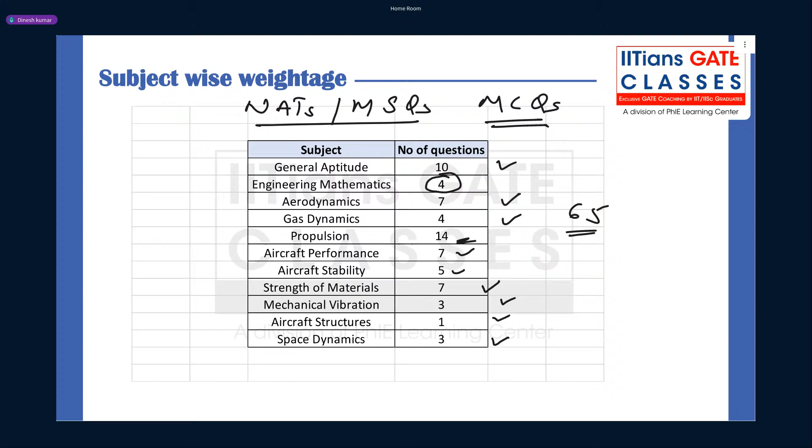In terms of question types, there were more NATs and MSQs, and less MCQs. So the advantage is there will be less negative marking for those who attempted a high number of questions. The NATs were straightforward, most of them easy to solve, so those who solved NATs with accuracy will get very good marks in this paper.

So that is about subject weightage. So guys, any concern or any doubt? I think whatever I am discussing, is it clear?

Now for paper analysis, since it's an easy paper, the advantage is all of you are very happy, and you guys should be happy after this paper.

And most of you could attempt a good number of questions. Okay. And again, now accuracy will matter most. What are the disadvantages of this paper? We discussed internally 1 week before itself. The gate scores are usually low in this paper against obtained marks. So you may get very good marks, like 57 marks or 55 marks. So with these 55 marks, this time your gate score may be 600 to 650. In earlier papers with 55 marks, in a 2023 kind of paper, your gate score is always greater than 700, or 700 to 750. So clear.

So your marks this time may be more, but your gate score may not be that high as in previous tough papers. Okay. Now, what are the good marks to get a very good rank? 55 plus marks with a good attempt and good accuracy is good to get a good 2 digit rank, under 100 kind of rank. And if you want to get a single digit rank, then your attempt should have been around 60 plus minus, with an accuracy of around 80%. Those who attempt around 60 plus minus, their attempted marks will be around 90, and with 80% accuracy they will be getting around 75 marks.

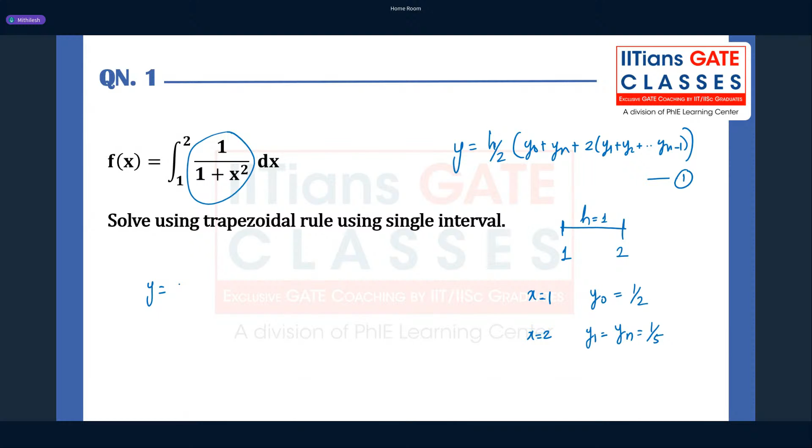And yn will be 1 upon 1 plus 2 square, which is 1 upon 5. So the value of y1 or yn will be 1 upon 5. So using this equation number 1, we can find it. Y is equal to 1 by 2 because h is 1. Y naught is 1 by 2, and yn is 1 upon 5. We don't have any other terms, so you can ignore it, since we are dealing with only one single interval.

So if you further solve it, it will become 7 by 10 into 1 by 2, which is equal to 7 by 20. And if you solve it, it is 0.35. Okay, so it's quite easy. Do you have any question in this? Do you have any doubt?

Okay. Then let me proceed towards the next question. Okay, this question is there. If P plus Q is proportional to P minus Q, then the value of P by Q is, and they have given the options: depending on P and Q, constant, depending on P, or not known. So let's try to solve it.

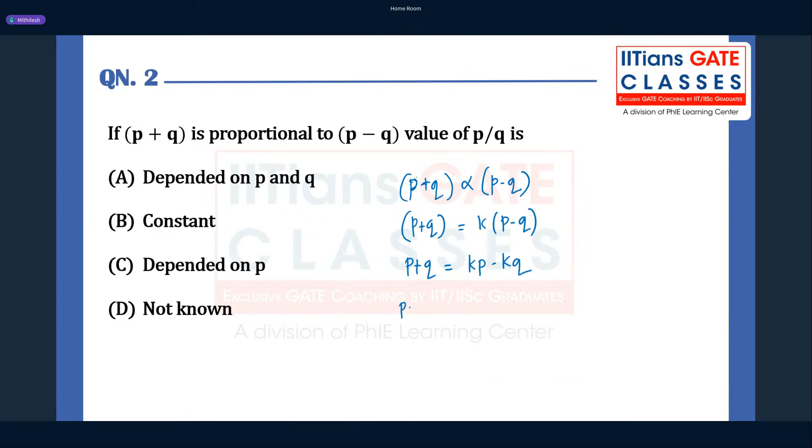Starting with the given data, P plus Q is given as proportional to P minus Q. So we can say that P plus Q is equal to K times P minus Q. And if you simplify it further, P plus Q will be equal to Kp minus Kq. Let's take the P and Q on either side. So it will be P minus Kp is equal to minus Kq minus Q.

So further, if you take P common, it will become 1 minus K. And here, if you take minus Q common, it will become 1 plus K. And now P by Q can be written as minus of 1 plus K divided by 1 minus K. So we can clearly see K is the proportionality constant. And if we add or subtract 1 and then make its division, it will end up with again a constant number. So we can say it is a constant. So option B is correct in this case.

We got one question here from Rohit about the previous question. That is, can we have 0.39 as an acceptable answer? So I'm not completely sure, Rohit, what is the range they have given you within the question, whether it's up to 2 decimal places or 1 decimal place. So depending on it, it will vary.

And yeah, if they give a range like 0.3 to 0.4, maybe in that case, your answer is also acceptable. And if they give a very precise range, 0.34 to 0.36, then in that case, they may ignore it. So yeah, it's depending on what range they have decided and how many decimal places they are mentioning in the question.

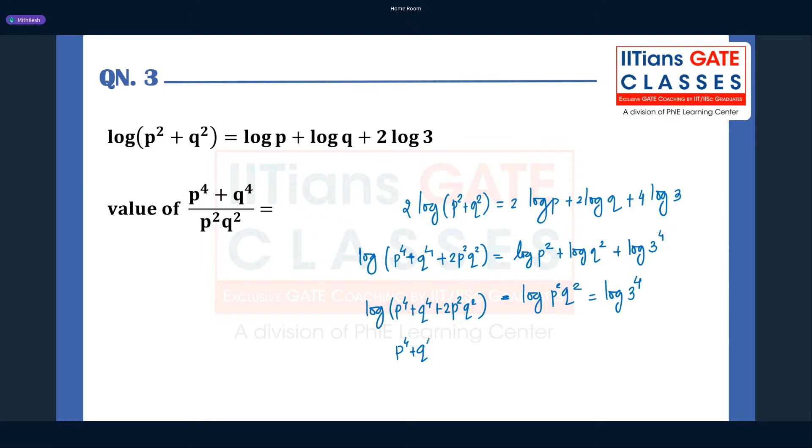Log of p raised to the power 4 plus q raised to the power 4 plus 2p square q square. So log a minus log b is equal to log of a by b. So p raised to the power 4 plus q raised to the power 4 plus 2p square q square divided by p square q square is equal to log of 3 raised to the power 4. Here also log, so we can cancel the log on both the sides. So this will become

p raised to the power 4 plus q raised to the power 4 divided by p square q square, if you break it at this point, and then one more term here you'll have, 2p square q square divided by p square q square. And that is equal to 3 raised to the power 4. So you can cancel out these two terms, you will end up with a 2. This is the required term.

So p raised to the power 4 plus q raised to the power 4 divided by p square q square plus 2 is equal to 81. So the answer is 81 minus 2. And yeah, 79 is the correct answer in this case. Okay. Yeah, most of you have answered it correctly.

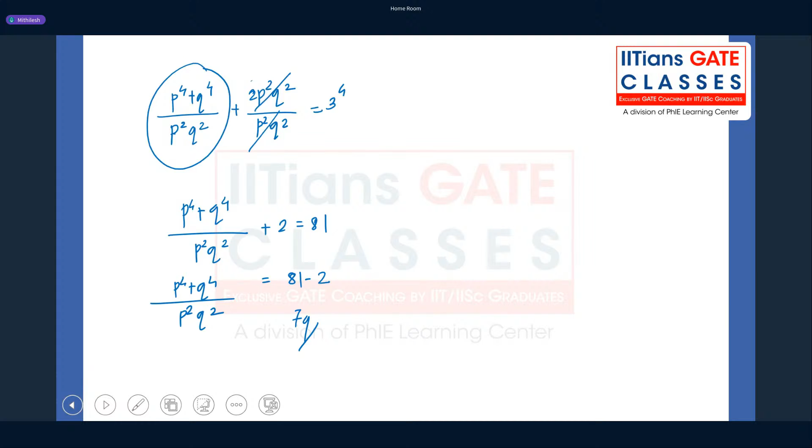Let me go to the next slide. We have this question from differential equations. Let's see what it says. They have given us the value of y, and they are asking us to solve a differential equation d2y by dx square minus 2p dy by dx plus p square plus q square into y is equal to. Let's solve it.

So the value of y is given. From this value of y, we can calculate dy by dx. I'll directly write the dy by dx term here. It is e to the power px into bracket p sine of qx plus q cos of qx. And if you simplify it inside, it will become p e to the power px sine of qx, second term, q e to the power px cos of qx. So this is how the dy by dx term looks like.

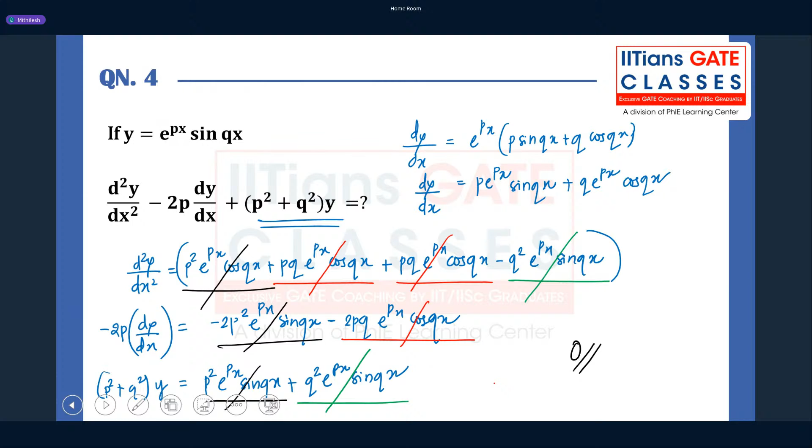And then we have p square e to the power px sine of qx, one more p square e to the power px sine of qx, and this negative term, and these cancel out with each other, hence the answer is 0. All the terms are getting cancelled, so you'll end up with 0 as the answer. I hope it is clear. Yes, most of you answered it correctly. Good. Let me go to the next slide.

Yeah, this one is from linear algebra. They are asking us to find the ratio of the largest eigenvalue to k. So the largest eigenvalue is maybe lambda max, divided by k. So in this case, first of all, we have to calculate k, find out the eigenvalues, decide the maximum or largest eigenvalue, and take the ratio with k. In this case, they have given us that the determinant of the given matrix is 3. So let's first use that data.

Determinant of the given matrix is 5, k, 4, minus 1, determinant equal to 3. So 5 into minus 1 is minus 5, plus 4k is equal to 3. So 4k is equal to, this minus 5 goes on the right hand side, it becomes 8, right? And this implies k will be equal to 8 by 4, so it will be 2. So the value of k, first of all, in this case is 2. Now we'll make use of this k and put it into this equation and get the value.

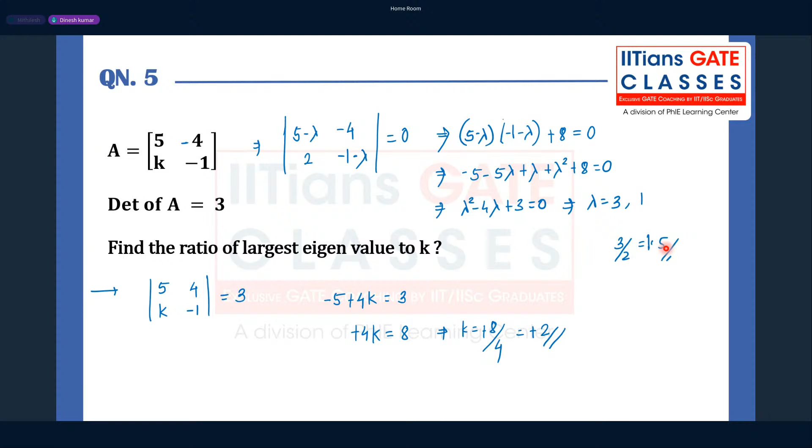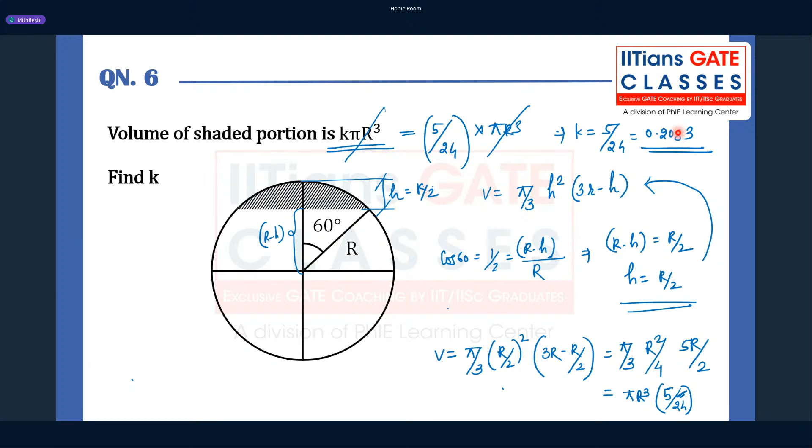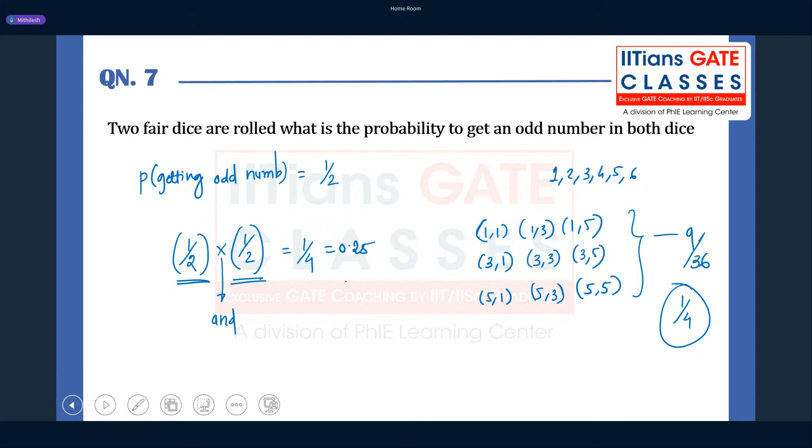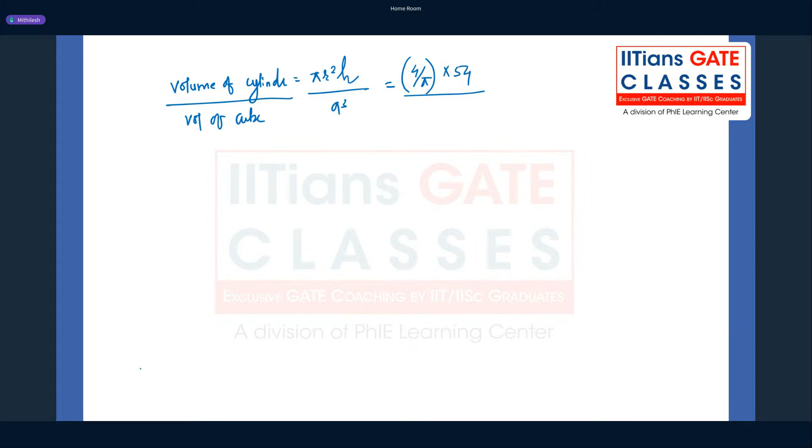Height is 54, so we have 4 by pi times height 54, divided by volume of the cube, which is 36 into 6, or 6 cube. Calculating through: 6 ones are 6, 9 ones are 9, 4 ones are 4 — the answer comes out to 1 by pi. So option A is correct.

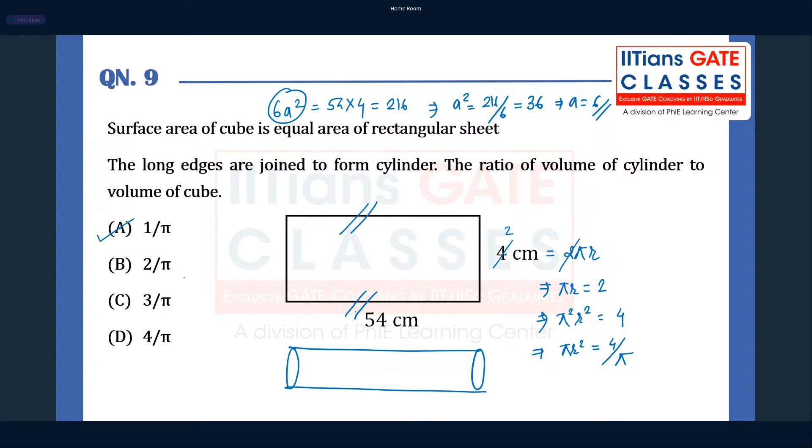Most of you answered it correctly; 1 by pi is the correct answer. Let me go to the next slide. Is this clear to all of you? Any doubt in this question? Okay, I'll proceed to the next question.

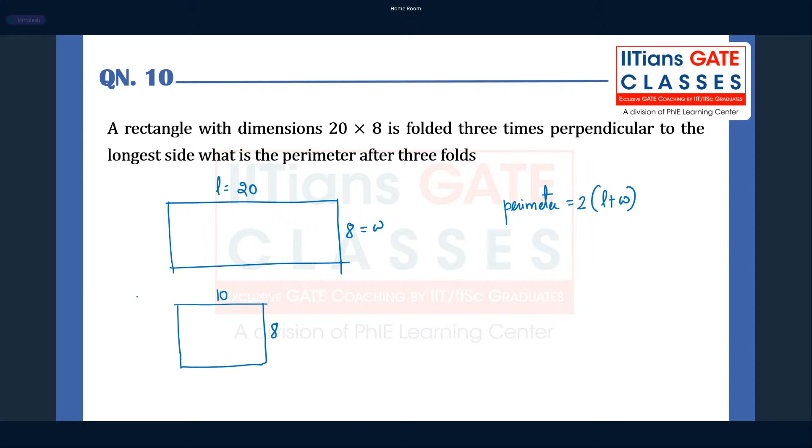If I fold it once, it becomes 10 by 8 — that's the first folding. For the second folding, it becomes 5 by 8. Folding a third time, it becomes 2.5 by 8. Calculating 2 into (2.5 plus 8), that's 10.5 multiplied by 2, giving 21 as the answer.

Any doubts in this case? Okay, we have some comments here — some students got 18.

Okay. Okay, so here.

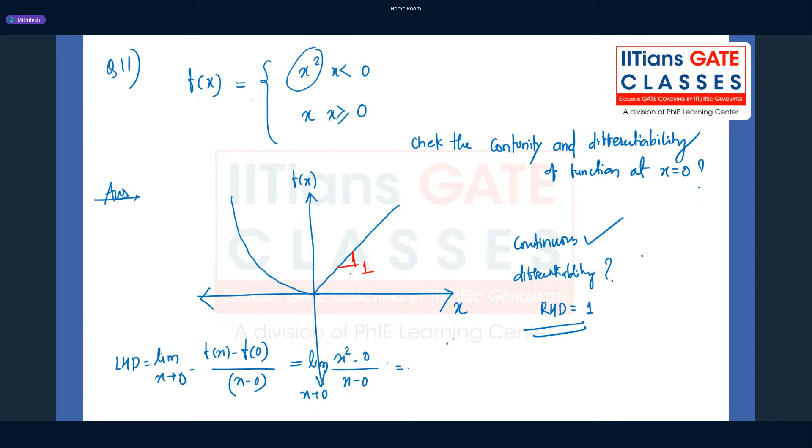Basically, limit x tends to 0 from the negative side, and you can clearly say x square by x is x. If you put the value of x, you'll end up with 0. Because you can clearly see the curve is becoming a little bit horizontal here - if you approach very close to 0, the curve becomes horizontal, meaning its slope is 0, and that is what we are getting.

So it's correct: the left hand derivative is not equal to the right hand derivative. Hence, this is not a differentiable function. So continuous, yes, but not differentiable. The correct answer is that it is continuous but not differentiable.

Okay, we have some questions about the previous question, I'll come back to that. Some of you got 18, some of you got 21, because we clearly don't know how the wording of the question is at this point. So whatever you told us, we made these questions and explained them to you. Is there any doubt on this particular question?

Is it clear, this differentiability and continuity? Most of you got it correct, that it is continuous and not differentiable. I'll go back to the previous slide. Yes, so as I said previously, I calculated that.

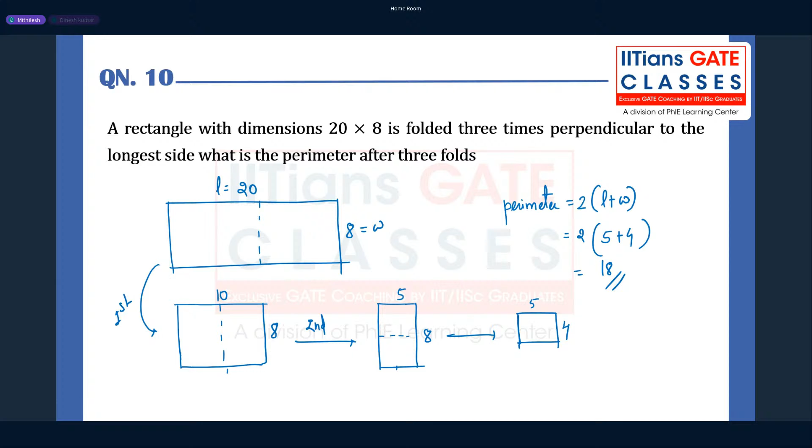Just one comment I'll add is it completely depends on the wording here. If they say about the length, in this case the answer is 21, and if they say about whichever is the longest side, then 18 is the correct answer.

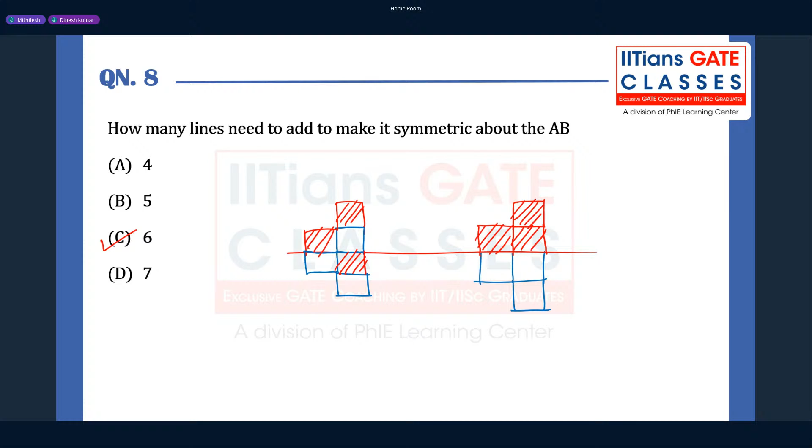Any doubt? This figure is a little unclear, but looking into the options, 6 is what we feel is the correct answer to make it symmetric. Most of you have gotten 6, so I think it should be correct.

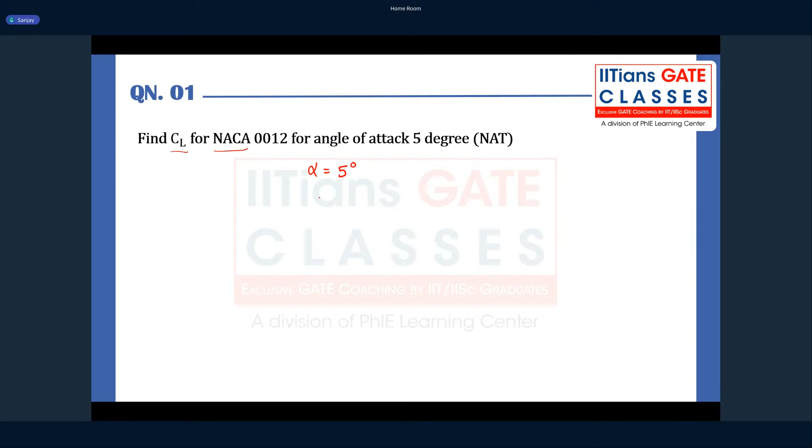Because without mentioning that statement, it is really not possible to proceed. So assuming that thin airfoil theory is applicable, we can use the results from thin airfoil theory that the lift curve slope, that is CL alpha, is equal to 2 pi. Okay, so the lift curve slope is 2 pi. So how can you find CL? CL is very straightforward. It is just 2 pi into alpha.

Okay, because it is a symmetric airfoil, right? NACA 0012 is a symmetric airfoil. You see the first two digits, it says that we do not have any camber, right? So it is a symmetric airfoil. We do not have a zero lift angle of attack. So CL would simply be equal to 2 pi alpha. Okay. So we just have to calculate this, right? So 2 into pi into alpha.

Now remember, guys, the alpha that you'll be substituting over here would be in radians, not in degrees, right? So you have to be careful about that. So 5 into pi by 180. Okay. So this is the angle in radians. Okay, just have to calculate this. Yeah, I think someone has already commented. The answer is 0.55. Yeah, I think that's what most of you have got.

Yeah, so it is 0.55, right? So CL is 0.55. So the lift coefficient is 0.55. Is this what you have got, everyone? All right. So I think this was a very straightforward question. Let's now move on to the next one. So if you guys have any doubts, any clarifications, please put them down in the comment box.

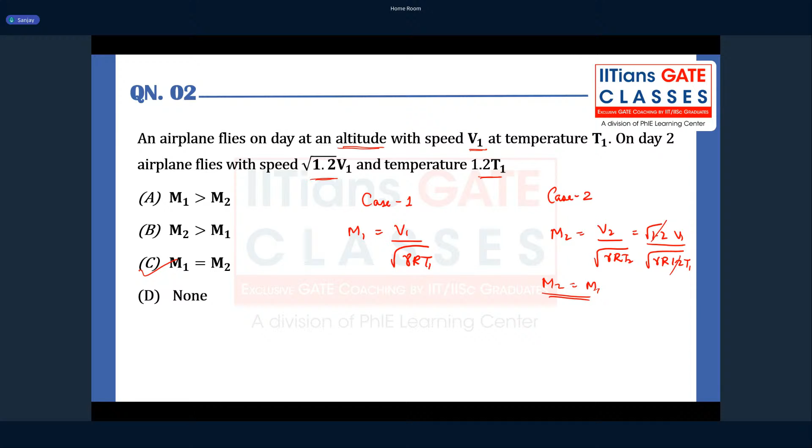Yeah, Rohit, you got some different answer. I think if these are the wordings in the question, then it should be m1 is equal to m2. Maybe you have made some mistake. So others also, have you got the same answer as C? All right. Okay. So that was very simple. Let's now move on.

So guys, from the potential flow theory, we have learned the elementary flows and superposition of elementary flows, right? So from potential flow theory, we know that when you superimpose a uniform flow with a source flow, what will you obtain, guys? Can you all say? If you superimpose a uniform flow with a source flow, what is the shape of the resultant potential flow that you obtain? It would be a Rankine half body, right? You will obtain a Rankine half body.

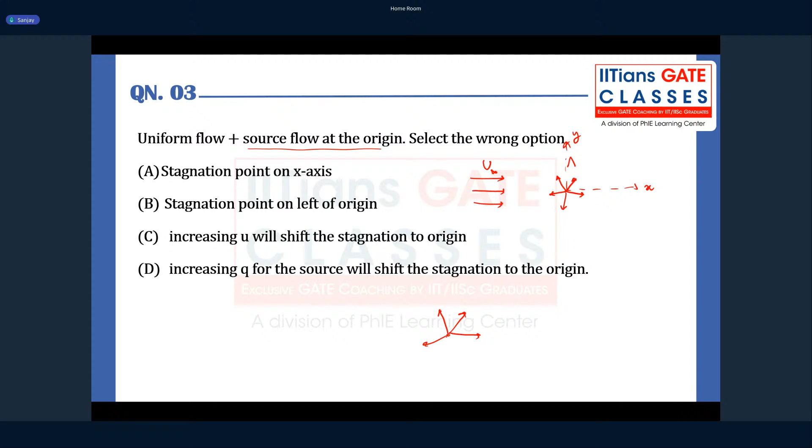So say here you have a source like this, and you add uniform flow, you will see that the streamlines would go just like this. So here it will go to infinity because all the flow towards the right is from the source, and all the flow towards the left is from the uniform flow, right? So what you obtain is a Rankine half body.

And guys, this is very well known from the potential flow theory calculations that the stagnation point for a Rankine half body is located at a distance of lambda by 2 pi v infinity, or u infinity, upstream of the source. Okay, it is upstream of the source.

Okay, so guys, this is very important: the stagnation point is located upstream of the source. So here in this case, if the source is located at the origin, the stagnation point will be on the negative x-axis. And what would be the distance of the stagnation point from the source? It is given by lambda by 2 pi V infinity.

Okay, so now let's look at the options. The first option says stagnation point on x-axis. That is correct, right? The uniform flow is aligned parallel to the source flow. There is no inclination to the uniform flow, so the stagnation point cannot lift off; it would be on the x-axis. So option A is correct, meaning it is a true statement. Option B says stagnation point on left of the origin, which is also correct. We just saw that the stagnation point will be on the left of the origin.

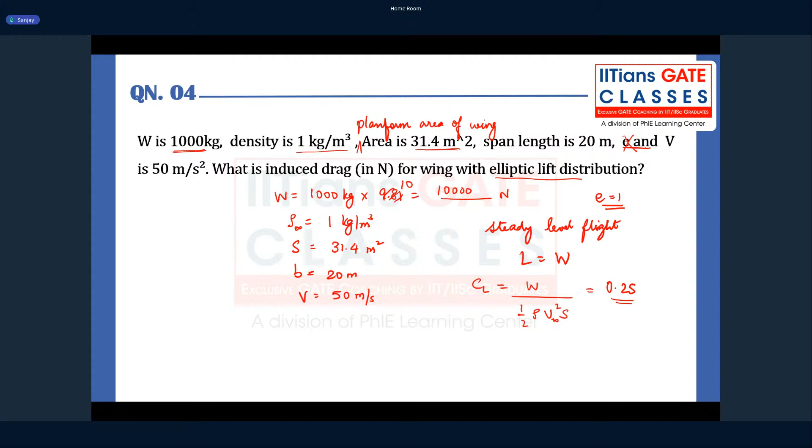So now once we have calculated CL, guys, we know the induced drag coefficient, that is CDI. Okay, Manjesh, you're getting 0.54. I do not know. If this is the data that is given in the question, then it would be 0.25. Anyway, we'll confirm all these answers once the official paper is out. So here just see the approach. We are not sure about the values, so that might change.

So CDI, the induced drag coefficient, is K CL square, right? It is directly proportional to the square of lift coefficient. So what is K here, guys? K is 1 by pi aspect ratio times E, into CL square. We know for elliptical, E is equal to 1, so this is not there. How will you calculate aspect ratio, guys? For a wing, aspect ratio is B square by S.

So just calculate. B square is 20 square, by 31.4. So what is the aspect ratio that you will get? 12.73. That is the aspect ratio that you get. So substitute all this in CDI and you obtain the value of CDI.

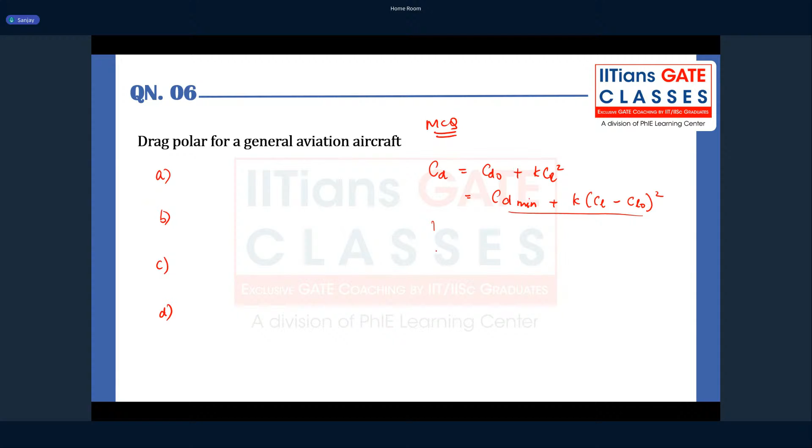So if you draw the drag polar curve now, this is CL, and this is CD. See, the drag polar could be drawn either way. You can have CD on the y-axis, CL on the x-axis, and vice versa. But let's take CL on the y-axis and CD on the x-axis, and then draw.

So you will see that it will be something like this. Here you will have the CD minimum. So the minimum CD is at CL is equal to 0. So this would be the drag polar curve. Did you guys find a similar curve in the options? Was it there? Can you confirm?

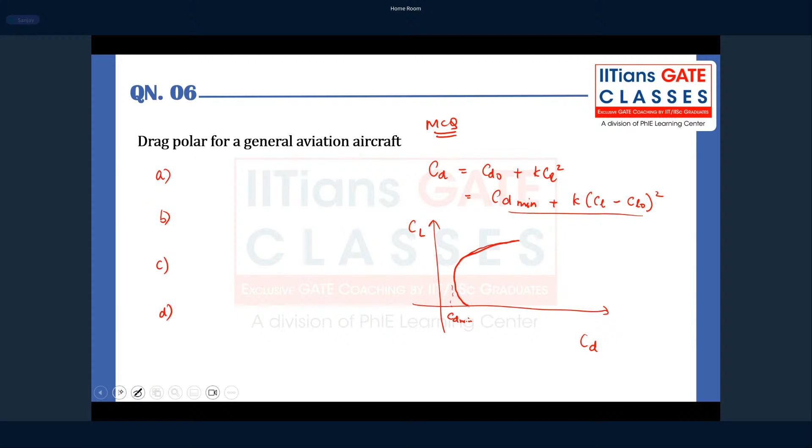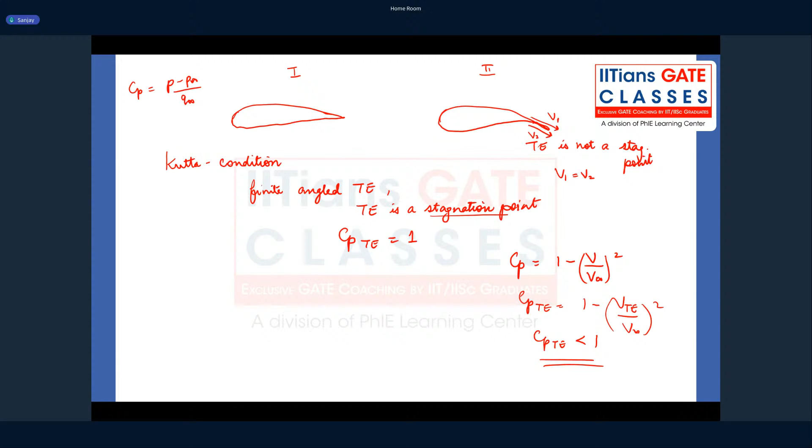So guys, now let's see the options. For the finite angle trailing edge, CP has to be equal to 1. For the cusp trailing edge, CP has to be less than 1. So option D here is the correct answer.

Did you all follow this? Yeah, is it clear to everyone? Any doubts? Okay, waiting for the response. Okay, yeah. So someone says they have gotten option D is correct. Okay. So let's move on.

So there are a few more questions which I got to know later. So let's discuss that also. So there was a question where you have an ellipse of length, say, C. And at the upstream, the velocity profile was given as a uniform flow. So this is U infinity here.

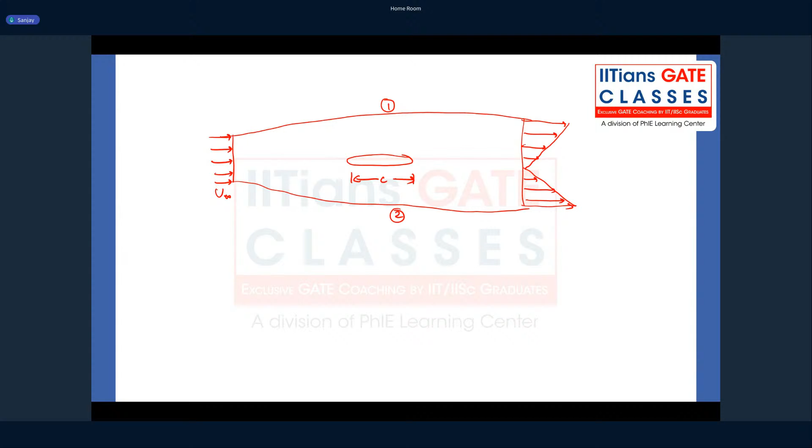At the downstream, which is the wake of this object, the velocity profile was given as a linear variation. And it was also given that these are connected by two different streamlines, streamline 1 and streamline 2, and there's an assumption that these streamlines are far away from the body. Also the upstream and downstream velocity profiles are far away from the body, so that pressure upstream can be assumed equal to pressure downstream.

So there is no pressure difference that is causing this flow, but it is rather the momentum change which is causing the wake. Now they had given the velocity profile of the wake, which is a linear profile. It was given as, I think, u infinity y by hd, and this was 0.03 c. I think this is what the question was.

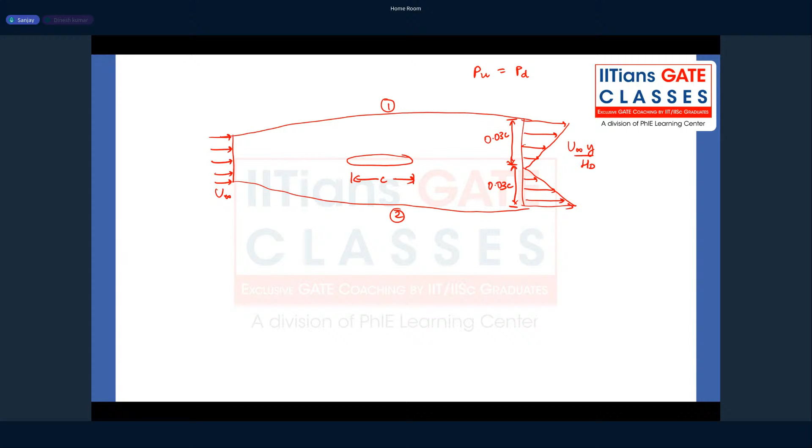Yeah, guys, can you all confirm if this was the exact question? This is what I got to know from you guys. Yeah, I think it was kind of a repetition from a PYQ. Yes, there was one similar question. Also, in our mock test, we have given a lot of similar questions like this. There was an elliptical body, and we had given almost the same velocity profile.

And the question was to find the coefficient of drag, CD, that is experienced by this body. So again, let's discuss the approach. You guys can anyway solve and find it out. First you have to find out the drag that is acting on this body. So for that, we'll do a control volume analysis. You just take a control volume which is surrounded by these streamlines, and let's apply the governing equations.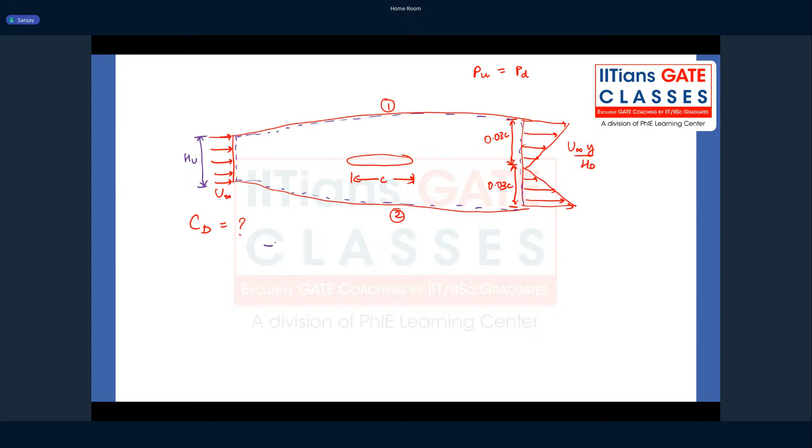Now, what are the governing equations here, guys? We have the continuity equation and the momentum equation. The upstream distance was given as HU. So let's first apply the continuity equation. At the upstream, you get minus rho into u infinity times HU. You can assume the span along the perpendicular direction is unit. Plus, this is the exit, so you have a positive sign. Since it is an incompressible flow, you can assume rho to be constant.

Now here you have a non-uniform velocity profile, guys, so to find the mass flow rate you have to integrate. So it is the integral of u of y dy. Let's take this integral from 0 to hd. 0 to hd means I'm just integrating the top half of the velocity profile. Then I have to multiply by 2 because there is also the bottom half. Because this velocity profile is symmetrical, the mass flow rate would be equal in top and bottom from the origin. So I can just multiply by 2 over here.

Okay, this has to be equal to 0, right? Because the 1 and 2 are given to you as streamlines, and since they are streamlines, there cannot be any flow crossing them. So you don't have any other control surfaces—only 1 and 2 are the control surfaces.

So u of y is given to you guys, you just perform this integration: minus u infinity HU plus 2 times rho, this is u infinity times y by HD, integrated from 0 to HD. By the way, this was HD, right? HD is 0.03c. So first let's preserve this as HD, and finally when we get the expression, let's substitute that. I think that will work.

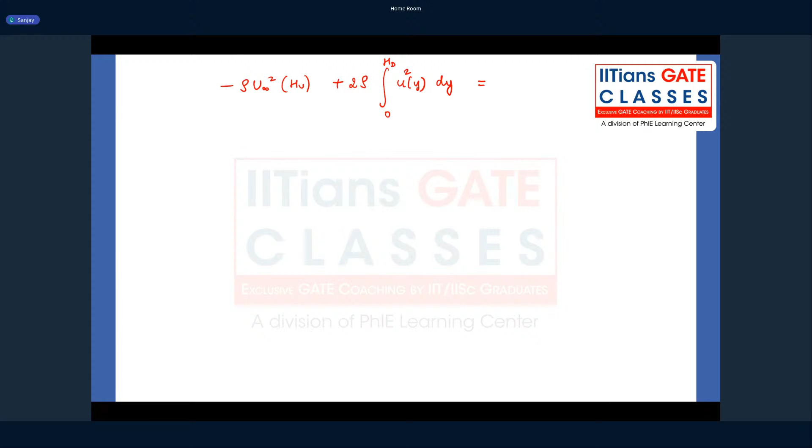Anyway, when we get the question, we'll confirm it once again. So, guys, this has to be equal to the net force acting on the body. What are the net forces? Surface force plus volumetric force. We don't have any volumetric force here, so the only force is the surface force, which is the drag acting on the body. Let's represent that drag as D. Because the drag acts opposite to the free stream, you can just put a negative sign to specify its direction.

So here you just have to substitute u of y: minus rho u infinity squared, HU is HD, plus 2 times rho integral of u of y, which is u infinity y by HD squared dy from 0 to HD, is equal to minus D. From here, guys, you can just integrate—it's very straightforward. You integrate, obtain the expression for drag, and then find CD as drag by half rho u infinity squared times c. So c is the length of the body that was given.

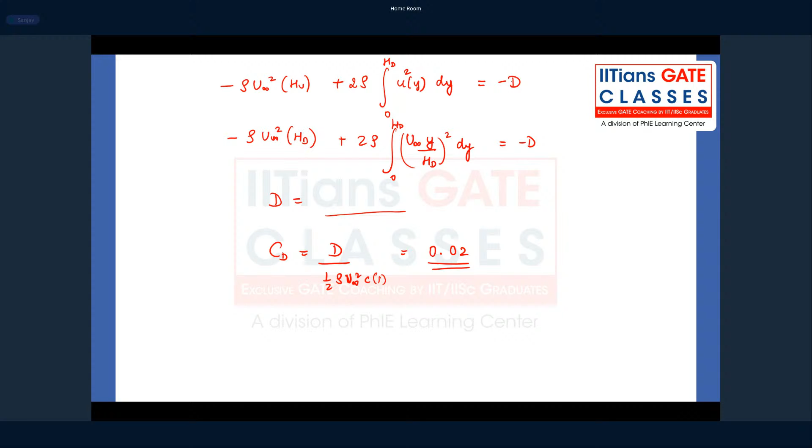So CD would be drag by half u infinity c into 1—you can consider the thickness as unity. So yeah, I think that's all you had to do. I think the answer would be around 0.02. So I think this is what others have got. If the dimensions mentioned in the question are correct, you should get this answer. If not, we'll reconfirm once the paper is out.

Let's discuss one more question from gas dynamics. There was a wedge, and the wedge angle theta was the same in all three cases. This is case 2, case 3. What was given was the shock pattern—the oblique shock pattern on these wedges in three different cases. In the first case, the shock was like this; in the second case, it was closer to the wedge; in the third case, it was a detached shock. Here this was M1, this is M2, and this is M3. So this was the question—can you guys confirm if this was the exact question? The options were to find the relation between M1, M2, and M3.

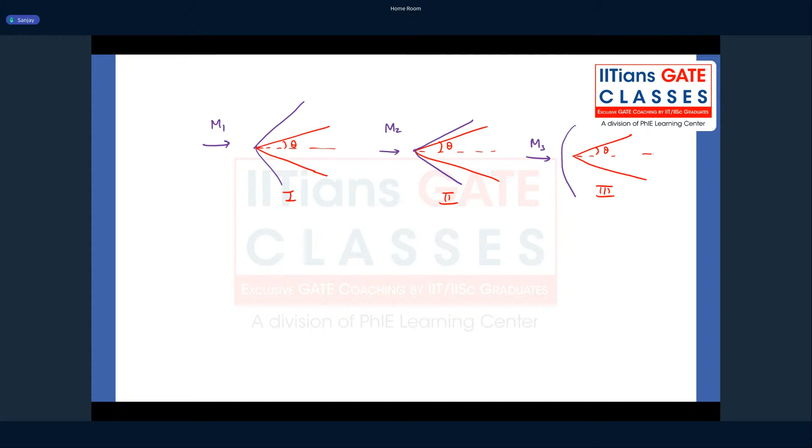Okay, so if you guys remember, then I think it was this. So how do we approach this, guys?

From theta-beta-M relations for oblique shock, or even from the theta-beta-M chart, if you see the curves, you'll observe a trend: when theta is held constant and Mach number is increased, what happens to the strength of the shock?

The shock moves closer to the body. So in case 2, the shock is closer to the body than case 1. In case 3, the shock is completely detached, which means when you decrease the free stream Mach number, keeping theta constant, then for a given threshold value of M, the shock will detach.

So M3 should be the lowest value of Mach number, followed by M1, because the shock angle is larger in 1 than 2, and then M2 should be the highest value of Mach number.

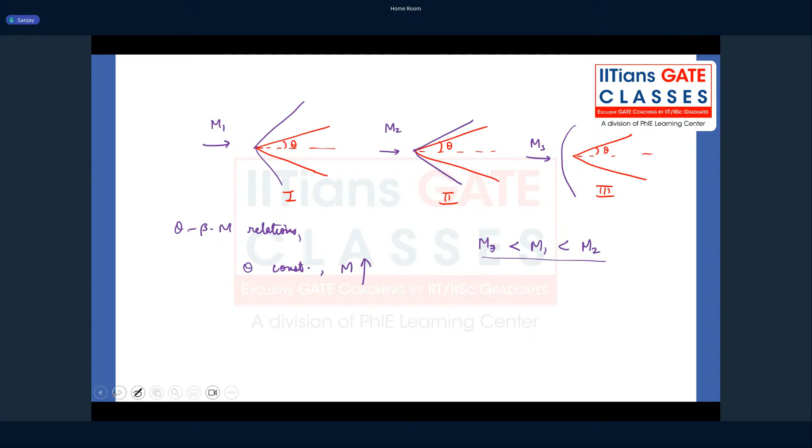Okay, yeah, so there's one more question, let's discuss that quickly. I think there was an expansion fan given, so it was an expansion corner. Expansion fan was given over here, so say this is the expansion fan, right?

So what was given here is M1, which is equal to 2, and here M2 was equal to 3, right? Because when the supersonic flow is expanded through an expansion corner, the Mach number increases. So in this case, it is M1 to M2, okay, and this is an expansion fan.

What was asked is the angle of this expansion fan, theta. This angle of the expansion fan, let's not call it theta because theta we represent for the wedge angle. Let's call this delta. So you have to find the angle of this expansion fan, right?

So guys, before finding this delta, as this is a Prandtl-Meyer expansion fan, this is the forward Mach line, and this is the rearward Mach line.

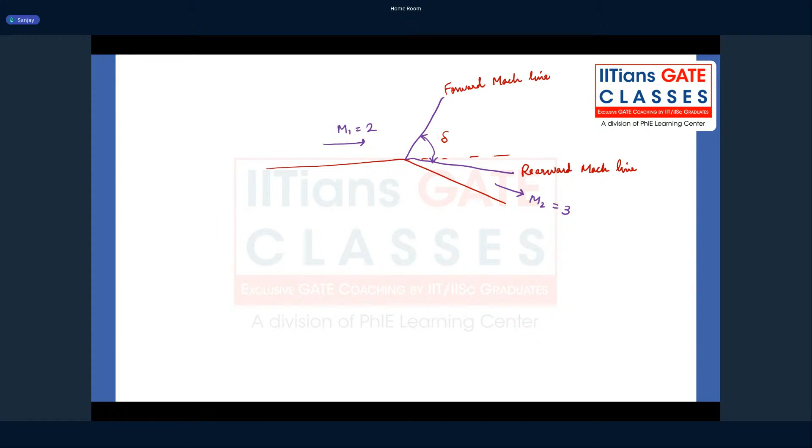Now you know what a Mach line is, right? A Mach line is the weakest oblique shock that you can get, and the Mach line has an inclination known as the Mach angle, mu, which is nothing but sine inverse of 1 by M.

Okay, so now before finding this delta, let's first find out what was the angle of the expansion corner. So this is theta, the angle of the expansion corner. So how will you find theta, guys?

You can find theta from the usual procedure of Prandtl-Meyer expansion fan calculation: it is nu of M2 minus nu of M1, where nu of M2 and nu of M1 are the Prandtl-Meyer function values at these Mach numbers. I think this was specified in the question, it should have been, because without this you cannot calculate theta. So from here you can calculate theta.

Okay, now once you get theta, you can also calculate the angle of this rearward Mach line, which is sine inverse 1 by 3.

Once you get this angle and the theta, you can now calculate the angle between the rearward Mach line and the x-axis. Similarly, you can calculate the Mach angle of the forward Mach line, which is sine inverse 1 by 2.

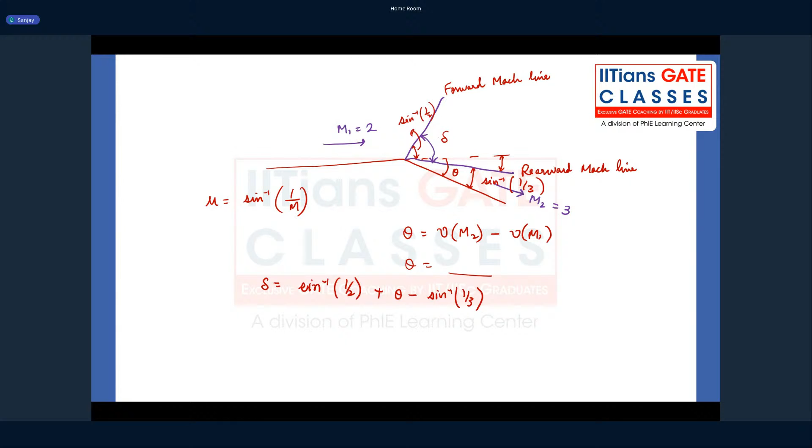Sine inverse 1 by 2, which is 30 degrees, right? So this delta now becomes sine inverse 1 by 2, plus theta minus sine inverse 1 by 3. So if you just calculate this based on the values given in the question, you will get the angle of the Prandtl-Meyer expansion fan. So this was again a very basic question from expansion waves, Prandtl-Meyer expansion wave theory. I think you all would have done this, right? Yeah, so that's all from aerodynamics and gas dynamics.

I guess there were a few more questions, but let's discuss them later when we get the paper. Yeah, so do you guys have any doubts? Is it clear?

Okay, Sanjay, you have done a lot. Let's keep that going, something for once the response comes out. Akshay, now you can take over. Thank you, Sanjay. You can tell more once the response comes. Akshay, you are now presenter. You can share your screen and we can start the propulsion part.

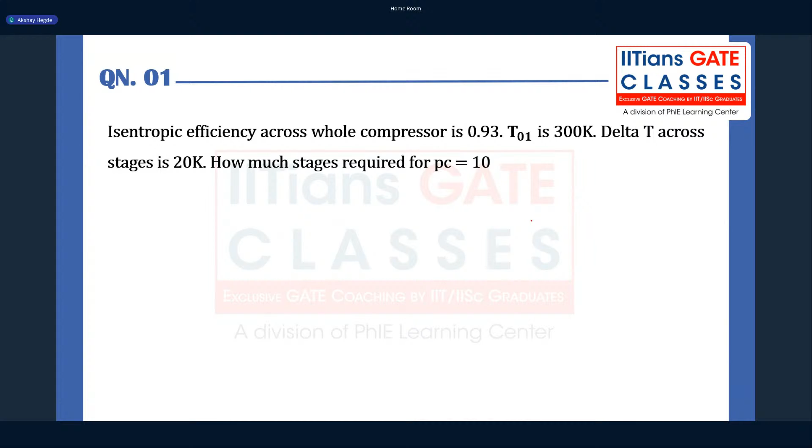Let us presume the statement is given in proper way: I have a compressor with an inlet stagnation temperature of 300 Kelvin, an overall pressure ratio of 10, and an overall efficiency of 0.93. Then I have multiple stages with each stage having similar work done, so let us call delta T naught across the stage as 20 Kelvin.

If this is the case, it is straightforward. The number of stages would be the overall delta T naught divided by the work done in the individual stage, assuming Cp to be constant and same mass flow rate. So now I know what is delta T naught per stage from the question. All I have to calculate first is what is the overall stagnation temperature change.

That one we can easily calculate using the efficiency of the compressor, which we can write in this fashion. If you use the TS diagram properly, you should be able to end up in this form. So delta T naught equals T naught 1 over compressor efficiency times the pressure ratio of the compressor to the power gamma minus 1 by gamma, minus 1. Now it's straightforward, you substitute back over here, and you should be able to get N is equal to. So you get the overall temperature change for this particular problem is something around

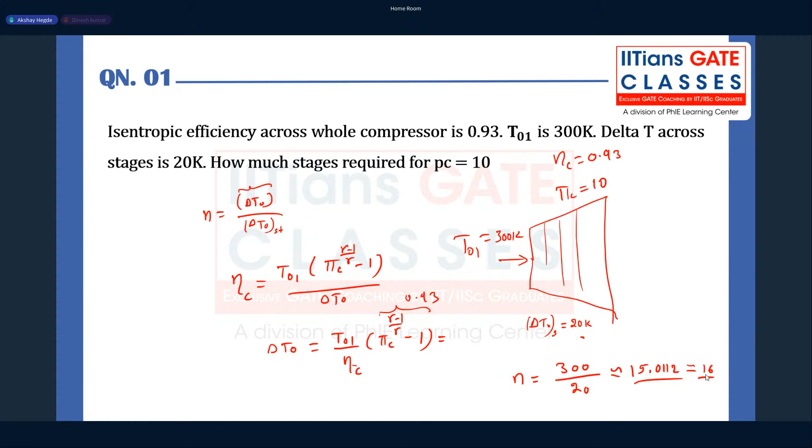So now the next question is a similar question. I was really surprised because both the questions are exactly similar. I am not seeing any difference here. Here also you have a compressor with some inlet temperature T01, and the number of stages is unknown. We have to calculate that, again using delta T0 across each stage.

They have given the pressure ratio as 10, and the efficiency of the compressor is 0.85. Then for an individual stage, the work done is distributed as 28 Kelvin. So again, it's the same thing. If you apply the efficiency formula for the overall compressor, from there you can calculate delta T0. So I can directly substitute N equal to T01 divided by efficiency of the compressor times, divided by delta T0 of the individual stage.

I don't have the data here for T01, assuming it is given between 280 Kelvin to 300 Kelvin, that's the usual range. So I think the answer is coming to nearly 12 stages. Is it? Then there might be some mistake, because here you are given a different value for the stage and a different value for efficiency. If both are the same, then the approach is the same. So there is no problem.

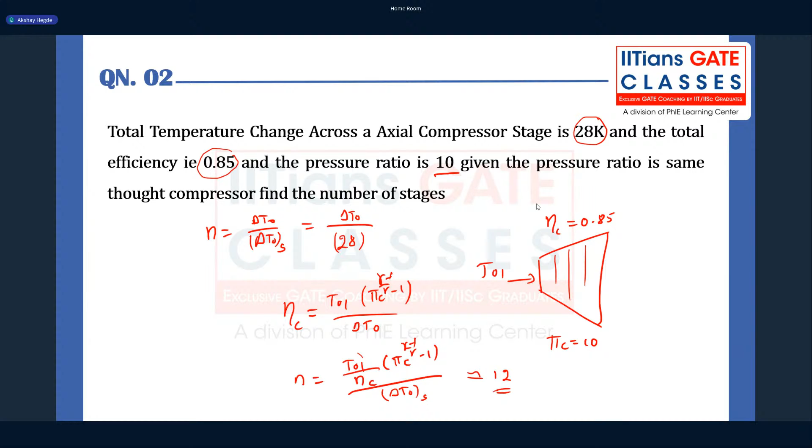Okay. Fine. So even if it is 273 Kelvin, you will be ending up around 11. Okay, we can move quickly to the next question.

This question is a very straightforward question. Given Cp and the value of gamma, find the value of R, the gas constant. We know Cp minus Cv is equal to R, and Cp by Cv is equal to gamma. If I divide by Cp, I get 1 minus Cv over Cp, which is equal to R over Cp. So 1 minus 1 over gamma is equal to R over Cp, which is gamma minus 1 by gamma. So R is equal to gamma minus 1 by gamma times Cp.

I don't know what values of gamma and Cp are given to you, but based on that you can calculate the value of R. If Cp is 1005 joules per kg per Kelvin and gamma is 1.4, you should end up with R close to 287 joules per kg per Kelvin. So this is how you get the value of R. Clear? Does anybody remember the values of Cp and gamma from this question?

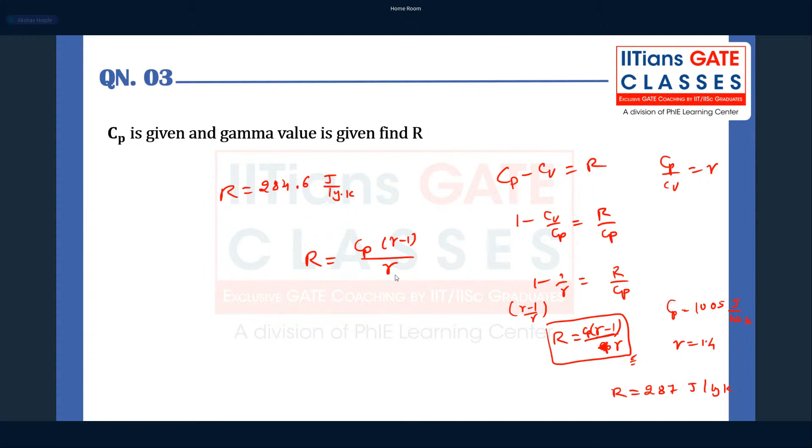Now let us move on to the next one. Mass flow rate of a rocket with a specific impulse of 200, thrust of 60,000 Newton, and gravity of 10 meter per second square. It's even more straightforward. Thrust can be written as mass flow rate of the propellant times the effective exhaust velocity, and effective exhaust velocity is specific impulse times g naught. So mass flow rate of propellant is thrust divided by Isp times g naught.

So thrust is 60,000 divided by Isp of 200 times g naught of 10. It will be 30 kg per second, right? I hope everybody got this number. Straightforward question. Clear?

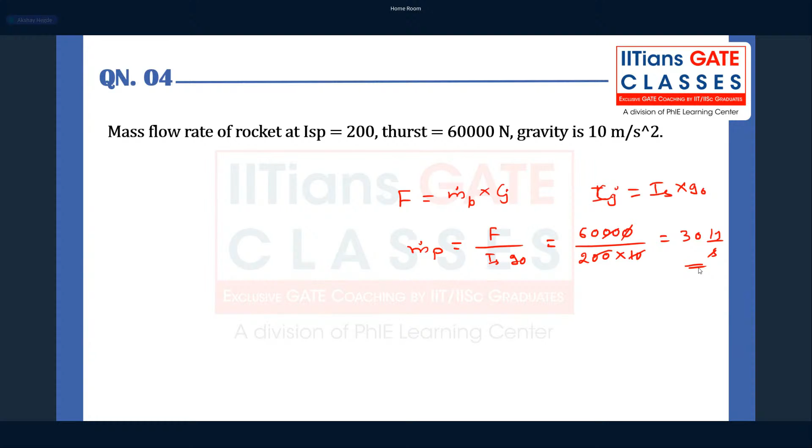Okay. So if you guys have no doubt here, I can move to the next one. An aircraft engine moving at 250 meters per second produces 60,000 N of uninstalled thrust. If its thermal efficiency is 35% and fuel mass flow rate is 3 kg per second, what is its propulsion efficiency? So I hope you provided all the necessary data here.

Say I have an aircraft with an engine mounted, moving at a speed of 250 meters per second and producing a thrust of 60,000 Newton, and you are adding fuel at the rate of 3 kg per second. It has a thermal efficiency given as 35%. They are asking you to calculate the propulsion efficiency.

So propulsion efficiency, we define it as thrust power to propulsive power. Also, we have a thermal efficiency that we define to be propulsive power to heat input. Right? For aircraft, it is propulsive power to heat input, but for a general cycle, it will be net work done to heat input.

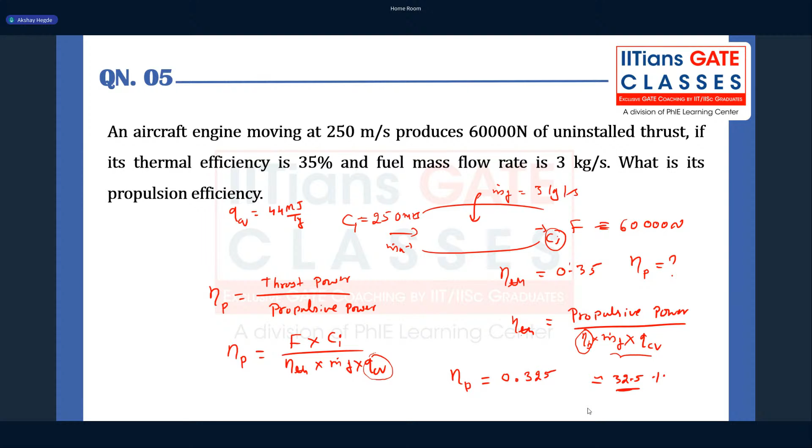Okay, fine. So this is how you can actually get this answer. Let us see once the official paper is out how this question was exactly asked. Okay then. Let us move to the next question. That's the last question of this session from the propulsion part. So here it is again a straightforward problem.

They have given the Cp value that is the same for both air and gas. So say, in a control volume fashion, I have a combustor where I am adding fuel with some calorific value at some rate. And I have a mass flow rate of air coming into the system, with a stagnation temperature at the entry of around 700 Kelvin, and at the exit I have a stagnation temperature of 1300 Kelvin with a mass flow rate of gas going out.

If I do the continuity balance, I would get mass flow rate of gas is nothing but mass flow rate of air plus mass flow rate of fuel. And if I do the energy balance, I should come to the form of fuel to air ratio as Cp times (T03 minus T02) divided by burner efficiency, which is already given as 100%, times QCV minus Cp times T03.

Again, in this problem, from the given data, you guys have not provided what calorific value is given in the question. So can anybody confirm which value of calorific value of the fuel is given to you?

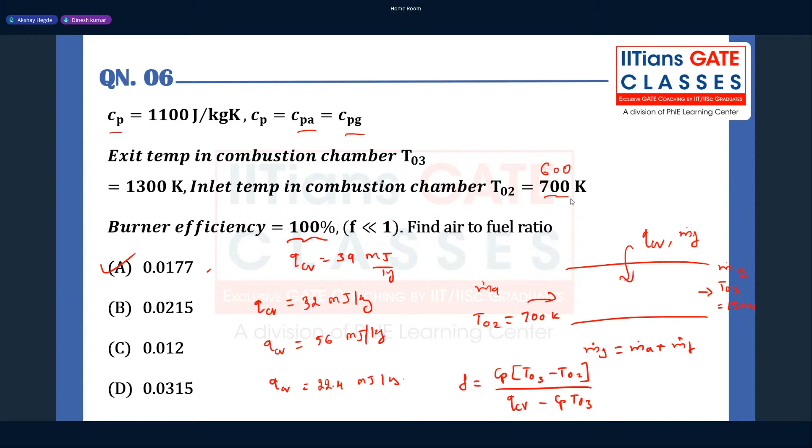I think gas dynamics part, Mr. Sanjay has already answered you. So any? Yeah, I think thank you, Akshay. We will answer their further concern once we get the official solution paper, then it will be easier for us also. Okay, sure. Thank you, Akshay, for your support. Praveen, please start. Now you are presenter. Okay, sir.

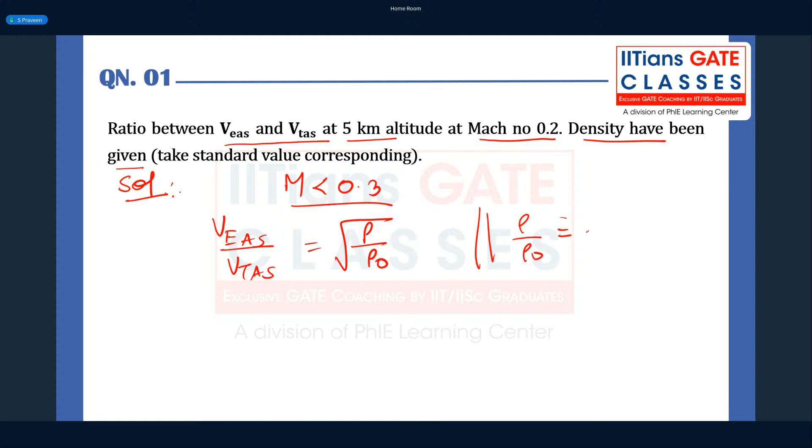which is basically the ratio of the equivalent airspeed to the true airspeed is nothing but under root of rho by rho naught. It's mentioned that densities have been given, so upon calculating rho by rho naught, you can just write that down in here. Because I'm not aware of the question details, if you calculate that and substitute it in here, you will get a value close to 0.775. So that says that our true airspeed is obviously greater than the equivalent airspeed. So this is how you should proceed with problems in this part. Let's go on to the next question.

How does density vary along the isothermal line? Again, this question is not yet clear. So let's write the formula, and with the formula you can clearly mention it. In an isothermal line, temperature is constant basically. If I plot temperature versus the height, temperature is constant. At the foot, it is 216.66 Kelvin. So you can just write at isothermal line, the temperature is constant.

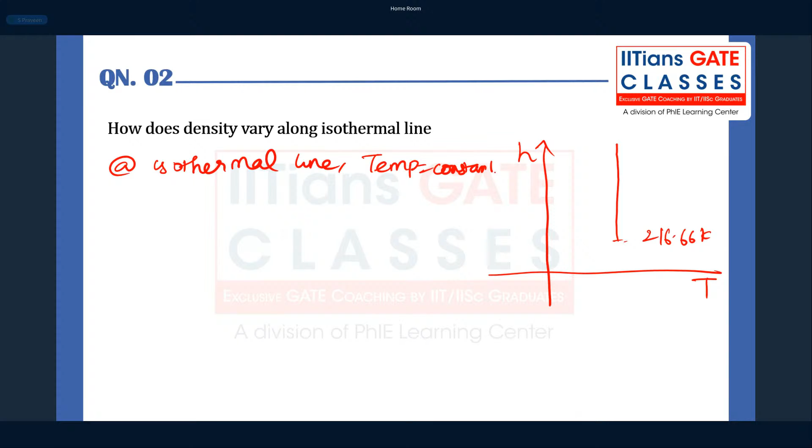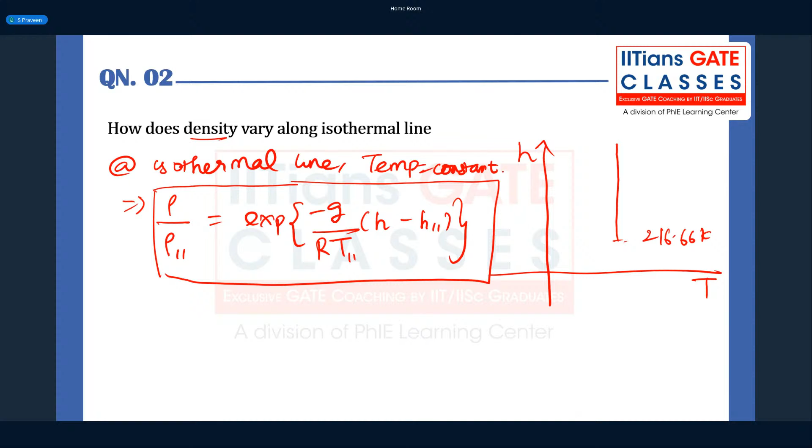So which means, if I invoke the ratios from the flight performance part, it is basically the exponent of minus g by R times T at 11 kilometer altitude, times h minus h at 11 kilometers. So this is the variation for the density. I'm not sure if it's density or pressure, but nonetheless both follow the same pattern. It is basically an exponential decrease. As height increases, density decreases. Hope that makes sense to all of you. If no doubts, then let's go on to the next question.

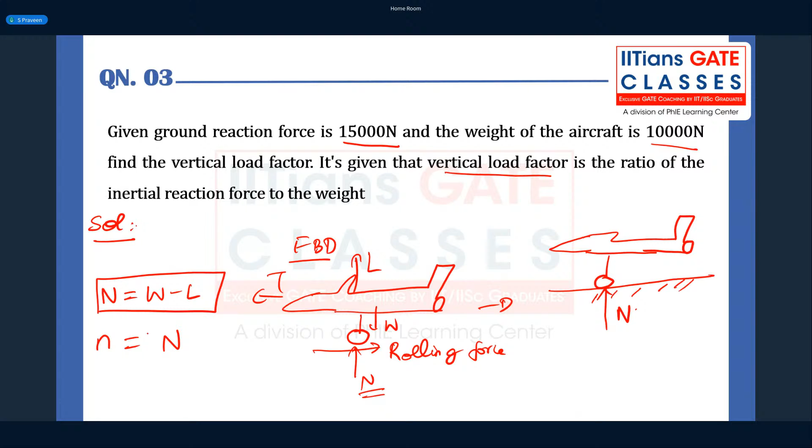So this normal force, again, this is the lift, this is the weight, thrust, and the drag. So the normal force is simply W minus L from our expression in here. So what's the vertical load factor at this point? The vertical load factor has to be the ratio of the inertial force to the weight, because it's given in the definition. So that would simply be W minus L by W. Given that your N is 15,000, substituting that, I can write n is equal to 15,000 by 10,000, which is equal to 1.5.

Okay, so hope that makes sense to you all. This is a pretty simple problem. Again, if they have given this as a rolling force, once we get the actual question paper around Feb 21, we'll just confirm with it. But the approach remains the same. So hope everyone understood this part. Let's go on to the next question.

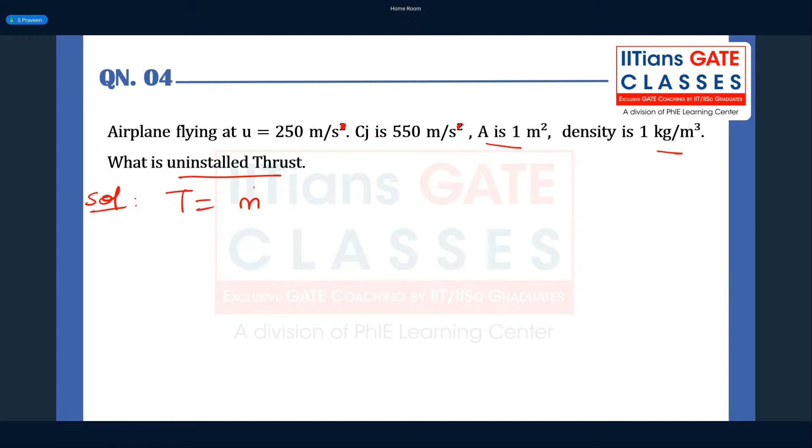So given that the airplane is flying at a velocity of 250 meter per second, and the exit velocity is 550 meter per second, area is 1, density is 1. What is the uninstalled thrust? Again, it's a pretty simple problem. The thrust is the mass flow rate times the exit speed minus the ambient speed, the speed of the ambient air. It's in relative sense. So what is this mass flow rate?

It is the density times area times the velocity of the aircraft, times the exit speed minus the speed of the air. So substitute all the values in here. It's 1 times U is 250 times 550 minus 250. This is 300 times 250, and that comes around to 75 kilonewton. So this is the uninstalled thrust. I hope the data is correct, and this is how you do this problem. Let's go to the next question if you guys don't have any doubts in this.

So this is the last question of this part. Find VP by VA if perigee altitude from the moon is 25 kilometer and apogee altitude from the moon is 135 kilometer, given that the moon radius is 1737 kilometer. Let's consider this axis. This is our moon. Because it mentions perigee and apogee, this has to be an elliptic orbit. Perigee altitude is this distance, 25 kilometer, and apogee altitude is this distance, 135 kilometer.

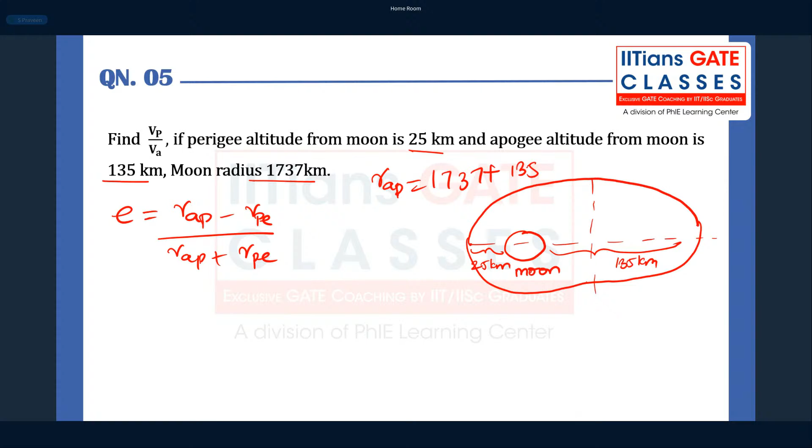First, we need to determine the eccentricity. Eccentricity is the distance of the apogee minus distance of the perigee, divided by the sum of them. So how would you determine this R? The apogee is the radius plus 135 kilometer, and the perigee is 1737 plus 25. If you substitute it over here, you will get an answer close to 0.0302. I hope my substitutions are correct.

Once you get this, we know the expression for velocity at perigee. It is simply the angular momentum, let's say of the moon, by the distance of the perigee, and velocity at the apogee is angular momentum by the distance at the apogee. Since they asked the ratio, let's divide them. So VP by VA, the H gets cancelled off, so you simply have RA by RP, which we have calculated over here.

So I think with this we cover the flight and space mechanics, which, like I said, there are around 15 questions asked, which was within the range that we discussed in the mock test series. Okay, fine. There might be issues, but once we get the actual question paper by Feb 21, we'll again create a new session in which we'll discuss each and every question in greater detail, right? So this is just the tip of an iceberg for you guys.

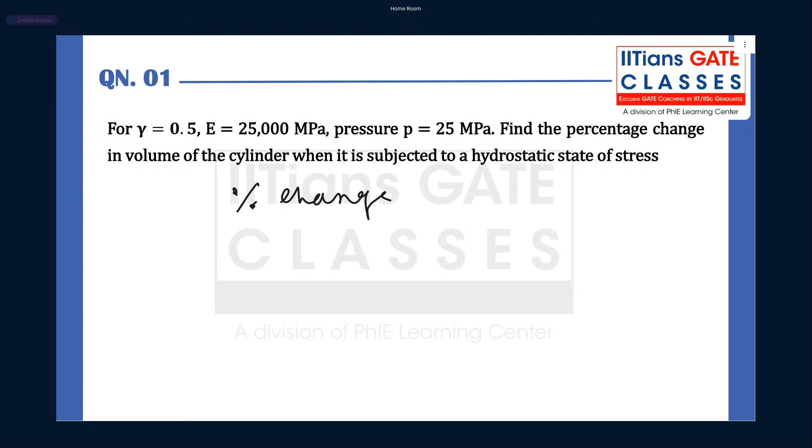Okay, so see the first question and tell me, after seeing this question, do we need to solve it? Guys, quickly. Abhishek, do we need to solve this question? Those who are watching this session, please quickly respond. Do we need to solve this question to find the percentage change in volume? Anybody?

No, I know the answer, Mr. Desi boy. You can become Pardesi also, if you are from the Hindi heartland.

I'm asking, not for the answer. I'm asking, do we need to solve this question? We need not solve this question. Why? This is not gamma, it is the Poisson's ratio nu. Nu is given as 0.5. So when nu is 0.5, guys, tell me what is K? Shrey, when nu is 0.5, K will be infinity. So the given material is what? Perfectly incompressible, right?

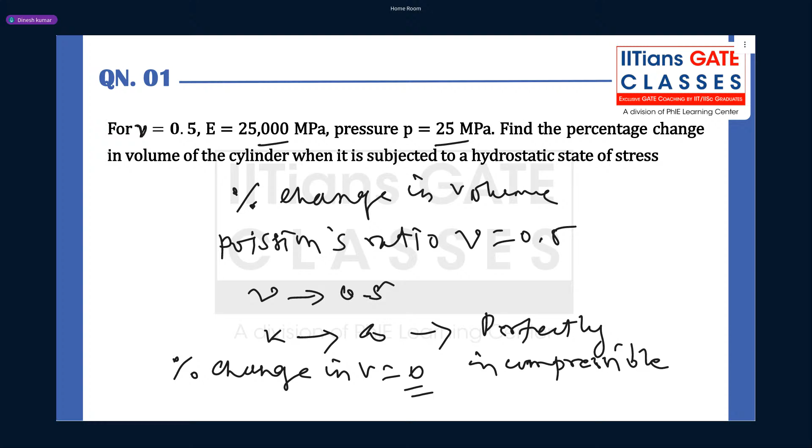So you all know, right? We solved a similar question in IGC. For a perfectly incompressible material, what is the percentage change in volume? It's always zero, because it's incompressible. Then why do we need to solve this question? Whether the given data is correct or not, we know K, the bulk modulus, is E upon 3 into 1 minus 2 nu. Where nu is 0.5, K is infinity. And when K is infinity, there is no change in volume.

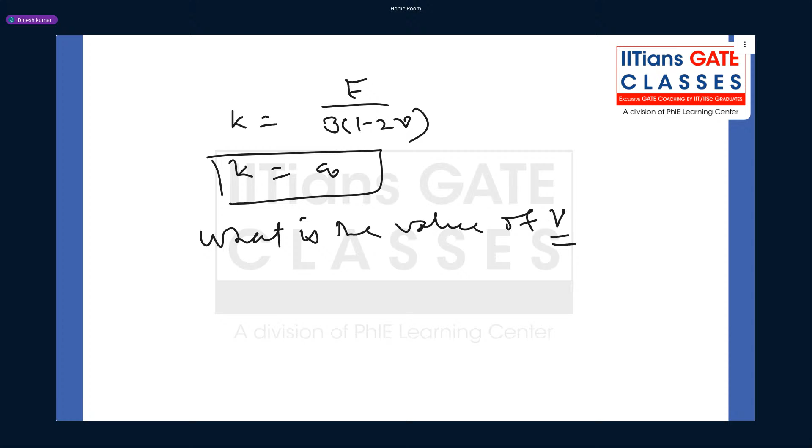So after just seeing the value of nu, you can answer this question within 1 second if you have solved the IGC questions, right? Because in IGC, one of the questions asked, for a perfectly incompressible solid, what is the value of nu? Anybody remember this question? If you don't remember, go and check the IGC notes. That question is there, okay?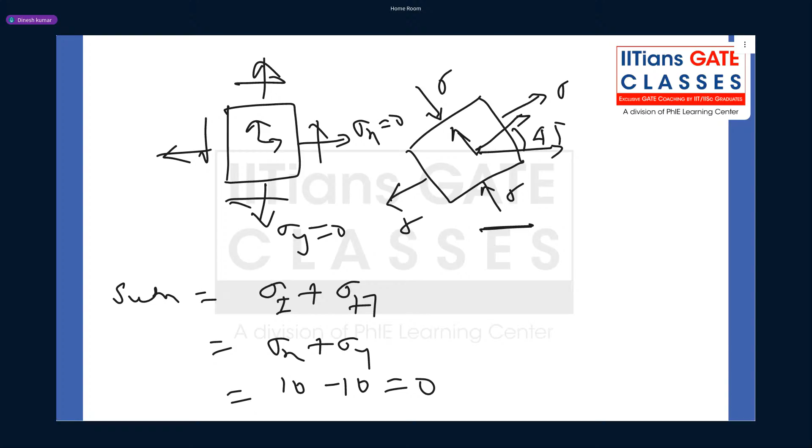Let's move to the next question. This is again from the formula sheet. They have given a pictorial representation of theory of failures, and they asked what is the answer for question number 10.

Answer is 18. Yeah Vishwa, I think due to that data - in aptitude you're telling, right? Question number 10 for aptitude. Yeah all fine, no worry Vishwa. Once the response comes, we will do all postmortems. Vishwa, let's not dig into that. Our idea is to provide what should be the procedure, okay, to solve, because these are all memory based questions.

So theory of failure, pictorial representation - you know this elliptical representation, and we know elliptical representation is for which theory, guys? Anybody who can answer watching this session? So elliptical representation is done for Von Mises theory.

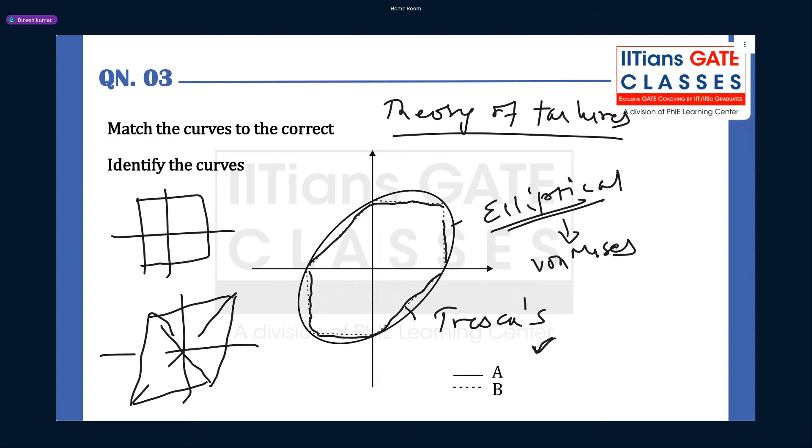So the inner part is Tresca's theory, right? Did they give other pictorial representations, guys, like maximum principal stress theory, or another theory, principal strain theory, which we can draw like this. So I think this was an easy question - if you know theory of failures pictorial representation, easily you can answer, and all these are already available with you in IGC resources. Let's see next question, guys.

In this question I don't have data, but I will tell how to solve. They gave epsilon xx value, epsilon yy value, and they gave tau xy equal to A, or gamma xy - it should be gamma xy. They told the material follows compatibility, and they asked the value of A. So we all know for a 2D stress system, what is our compatibility equation, guys?

It is given by what? Dou square by dou x dou y gamma xy, and this is equal to what? Dou square by dou x square, it will be epsilon y, plus dou square by dou y square, and it is epsilon x. So using this equation, we can find the value of unknown A.

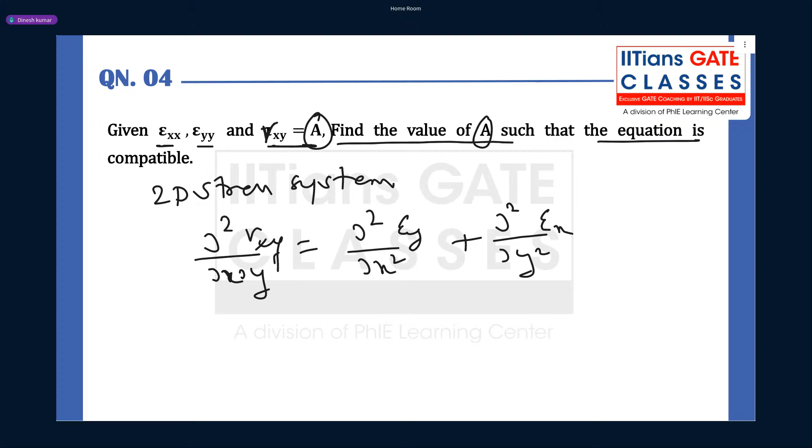Clear? This is a simple question, you guys will be knowing, right? In prior year also, they have asked a similar question, but it was for the equilibrium equation. That time also they asked for an unknown value of A, but what did they give that time? They gave sigma xx, sigma yy, and tau xy. And in fact, that was

an NPTEL question, and the same question was asked in GATE Aerospace. So in case of the equilibrium equation, what will it be? They told it in terms of absence of body forces. So what was our equilibrium equation? Sigma xx comma x plus tau xy comma y equal to 0. Using this, in that case, we found the value of unknown A. Clear? Can we move, guys? Next question.

Okay, so again here, guys, I had two options available and I have added two options. So read the question: which of the following is or are correct. This is one MSQ question from strength of materials or aircraft structures basics.

What it says: isotropic material has infinite plane of symmetry. This is correct, right? Because for isotropic material, the properties are same in all directions. In all directions, material properties are same, right? So A will be correct. Isotropic material will have infinite plane of symmetry. Now what does option B say?

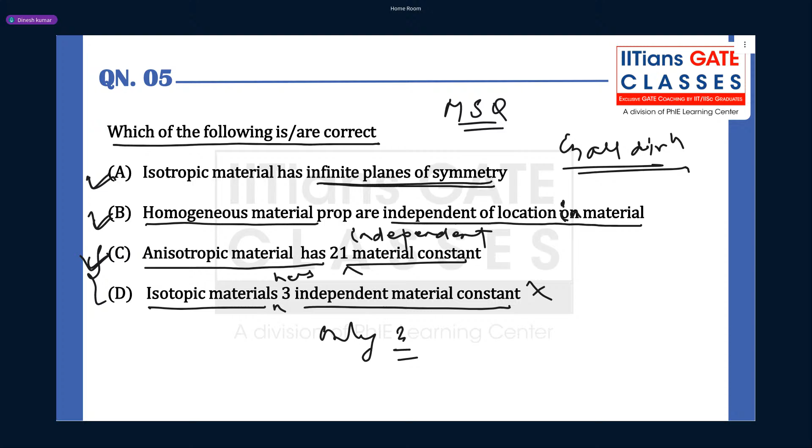We don't have that option, you can type na. What was that third option which was correct? So guys, for isotropic material, how many independent material constants? We all know, right? Only 2, because this is also a previous PYQ. So D is wrong. So this is how we can solve this MSQ.

So let's move to the next question. Now, guys, there was one question from vibration giving pictorial views, and they asked which figure corresponds to overdamped, critically damped, and underdamped.

I think Monty, we have answered your query already. Whenever you put a message here, know that all are preparing for GATE, they have already prepared for GATE. Nobody will contact you just like that in person. So please stop writing again. We didn't say you are a scammer, but nobody knows you personally, right? Then how will they contact you? Either you be in some group, join some institute, or don't join some institute, be in some open group like Telegram and all, then you will get some friends, no?

Okay, leave it, so this is another question. We all know, guys, for underdamped, what kind of motion is it? It is oscillatory motion, right? In case of underdamped vibration, the motion is oscillatory. So we can see option A, it's an oscillatory motion. Now, guys, they told for underdamped—

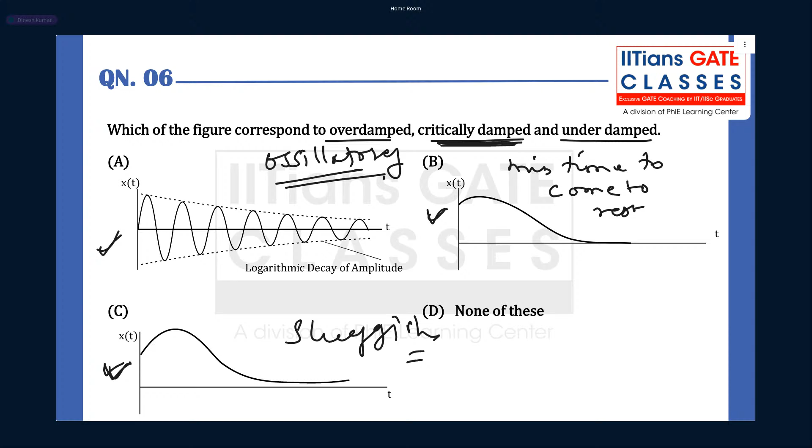Okay, thank you. So let's move to the next question. What does it say?

Yeah, so you guys can see this is a very simple question, a truss question. So guys, in this question, what have they given? A truss structure. There are two members, A to C and B to C, they are connected. Okay, usual, no problem, let us see in detail. So this question, guys, can you check if it is correct?

Quickly, guys, respond to this. Is this question correct?

So in this question, this is 2 meter, this is 2 meter. So if this is 2 meter, this angle will be 45 degree. And this will be 45 degree. And this will be 60 degree. Now what they asked in this question is, instead of 2 meter, it is 0.5 meter.

Both. Is it so, guys?

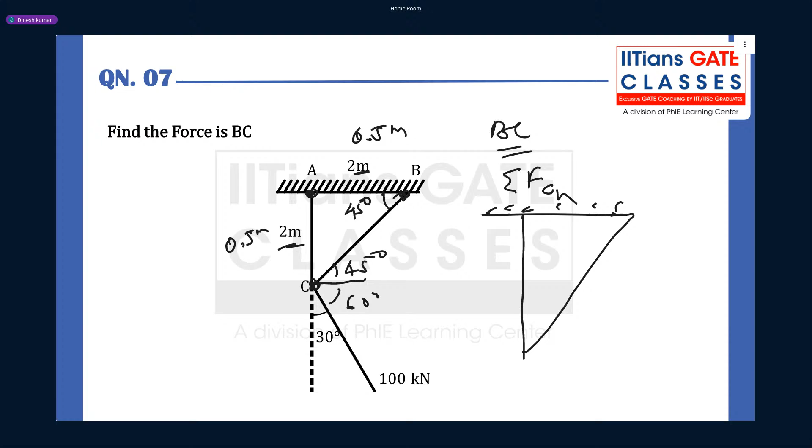Okay, take... okay, I got your point. Anyway, in that case also we can solve. Okay, we extended and then force is applied. Let me do it on the next page. I'm just telling the crux of how to solve this question.

So I think, guys, you have this landing gear. This landing gear can be idealized like this, and they applied force here at some 30 degree. So first, what we do is find the force in this member. This is C, A and B. Just resolve this given force in the vertical direction.

So what will be the component? It will be F cos 30. Now once you know this F cos 30, it will be acting like this. Now again here you can take the force equilibrium sigma FC, because we know this angle, guys, how much? 45 degree.

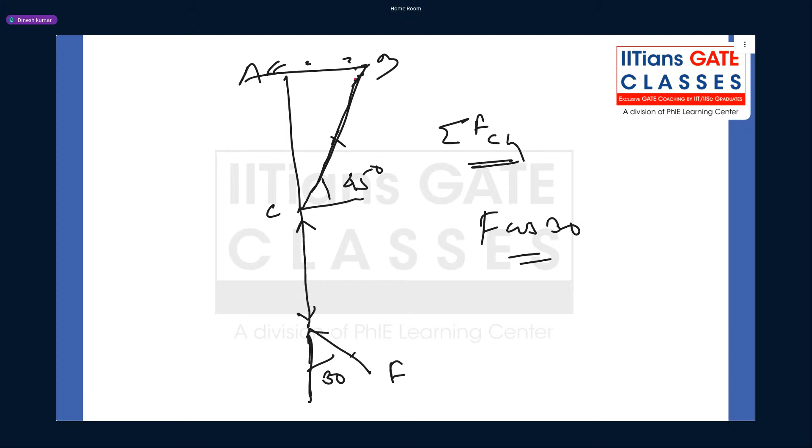Now one more question is that, guys, tell me really, will there be any force in BC? Quickly, guys, will there be any force in BC if this... I think it's better, if you see in this case, there will be no force in BC. Why? Because when you resolve horizontally, there is only one force which will give me horizontal components, which is in BC. So from horizontal equilibrium, your sigma BC will be 0, because this is in vertical direction.

Okay, so once we guys have the proper question, we can talk more. Now next question, what is it?

So this is one of the questions from thin wall structure, and in these questions what they ask is maximum normal bending stress. Now guys, in this question... no, why Pythagoras and all? See, we will solve this question, the previous question, like a truss question.

Because guys, in landing gear, the landing gear can be idealized as a truss structure, and we can solve that. When you will have force in BC, if there is some reaction, the vertical or horizontal reactions and all, so it's better that when we have a clear question, we can discuss more on that.

Now guys, look into this next question, this maximum bending stress question. So guys, it's a C section. Is it clear? For this C section, I currently don't have data like H value, T value and all. I'll just tell how to solve this question. So guys, in this case, C section is a symmetric section. So IXY is 0.

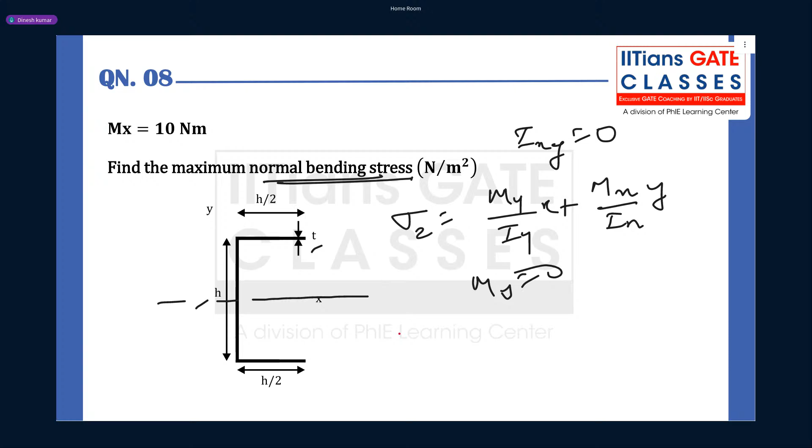I think you guys can do the calculation and all later. So I'll just tell how to find sigma Z. It will be Mx upon Ix into y. Now guys, where will it be maximum? Of course, it will be maximum at the furthest point. Okay, so it can be either bottom or top. They have already given Mx. We know y will be h by 2. You need to find

Ix. Okay, and then what is the t value given? H is 1 meter. What is the t value? Thickness? What is the t value? Okay, Shrey, I think that we can see later. No problem in that. So what is the t value here? Once t is known, we can solve this problem. So t should be known, and guys, it is 0.001.

Now, what is the major thing here? You have to find Ix. So for a thin walled structure, you should know how to find Ix. If you take it, it will be t h cube by 12. This is Ix, and then it will be t h into plus minus h by 2 square. Am I correct? So this is how you can find Ixx using the thin walled approximation.

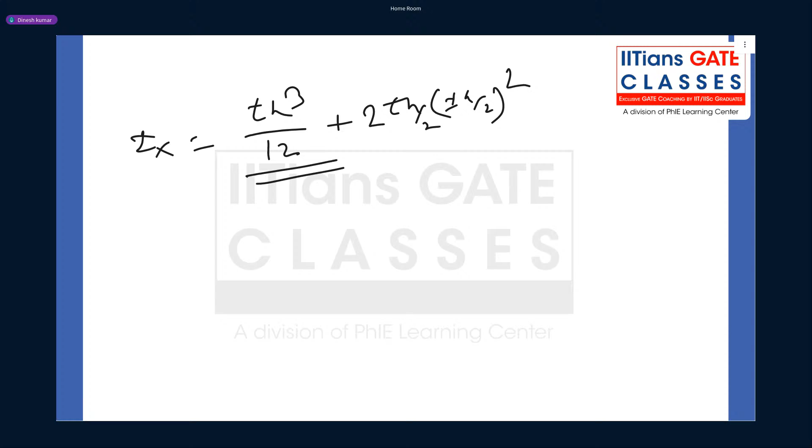Not just b d cube by 12. It's t h cube by 12 plus t h into plus minus h by 2 square. The area, and you have to multiply by 2. Guys, it is one side and this is another side. So it will be 2 into h by 2. That's why it is t h into plus minus h by 2 whole square. So hopefully this was not a tough question and could have been solved by many people who know the basics well, and the calculation will also be easier.

Now, guys, this is one of the questions from mechanical vibration, 2 degrees of freedom. They have given the equations of motion. What do they ask? The highest natural frequency. If you see the equations of motion for 2 degrees of freedom, they are given by m1 x1 double dot plus (k1 plus k2) x1 minus k2 x2 equal to 0, and then m2 x2 double dot plus (k3 plus k2) x2 minus k2 x1 equal to 0.

Now if you compare, we can find m1, m2, and also k1 plus k2 and all these values. Once you know all these values, what will be your natural frequency? We all know the natural frequency formula: m1 m2 omega power 4 minus [m1 into (k3 plus k2) plus m2 into (k1 plus k2)] omega square plus k1 k2 plus k2 k3 plus k3 k1 equal to 0. So using this we can find the natural frequency.

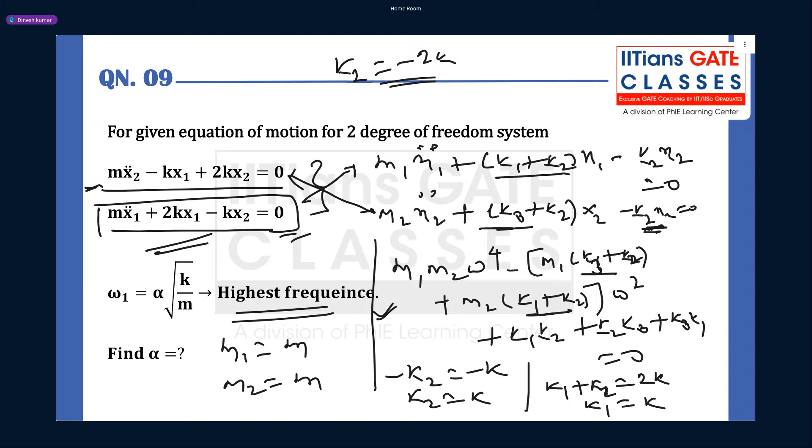So I'm just sharing how to solve this question, and this was not that tough. It was again an approachable, easy question from mechanical vibration. So that's all from my side in the structures module. So I can say most of the questions are easy. We have to check that truss based question, if anything is there in that question. Otherwise, you all can solve all these questions, okay, if you have learned well.